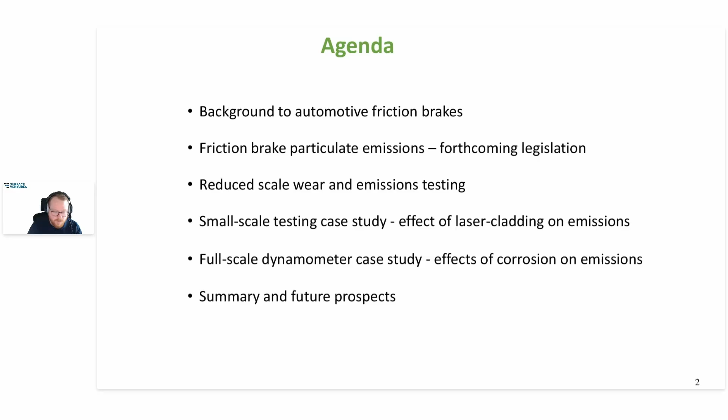In terms of the basic layout of a hydraulic disc brake, we can see on the left a section of an opposed-piston disc brake in which the action of the pistons is to push against the discs, and you can clearly see how that happens as they move towards the discs or the rotor.

We then look at the friction surface much more closely. We can see a classic three-body situation with the disc shown in blue on the right-hand side there, the pad in green, and the transfer layer formed between the two in orange. It's the tribological interaction between these three bodies that creates the frictional torque required to slow the vehicle. But as we know, friction generates wear. Wear leads to particulate emissions, which is commonly known as brake dust.

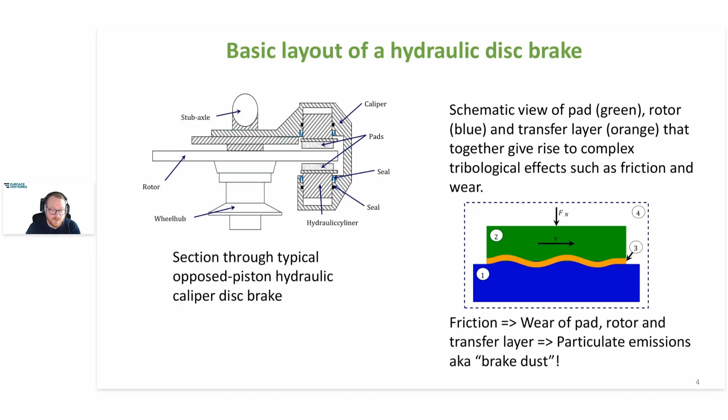And there have been increasing concerns about the effect of particulate emissions from road vehicles on human health, especially in urban areas. Particulate emissions are classified by their mean aerodynamic diameter into several different ranges. Different particle sizes, when inhaled, can penetrate into different parts of the body, with submicron particles able to cross into the bloodstream and even find their way into the brain, with those indicated such as PM1 and PM2.5. PM5 will be in airways, and then PM10 will generally be captured in the actual nose and mouth itself.

And with that penetration into the brain, there have been links found between nanoparticles in the brain and Alzheimer's disease. The second graph on the right indicates that as PM2.5 and PM10 emissions from internal combustion engines have diminished, largely due to the use of particulate traps on diesel engines, the contribution from so-called non-exhaust emissions will continue to rise and may already exceed that from exhaust emissions. And of those particulate emissions, we can see that nearly 1/3 of those is friction brakes.

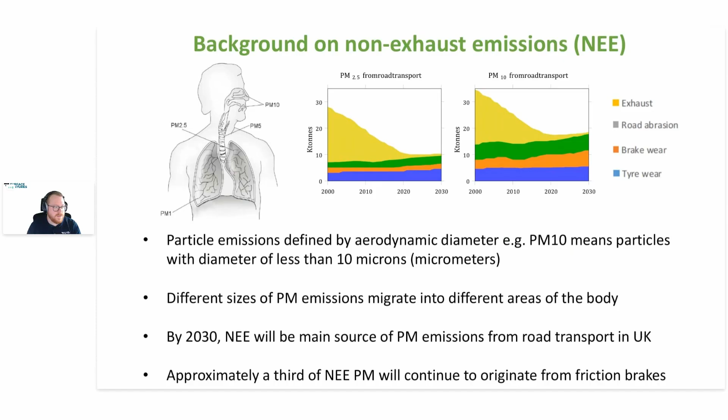So let's now take a look at friction brakes in electric vehicles. Firstly, all types of EVs are still required to carry friction brakes for situations when regenerative braking is ineffective or inadequate. One important consideration is that EVs tend to be significantly heavier than their internal engine equivalents, as shown in the right-hand figure, where we can see vast differences in weight between the different classes of vehicle. On average, PEVs are 26% heavier than their internal combustion engine counterparts. And GVWs are typically over the 2-ton mark.

Tire and road surface emissions are therefore likely to be higher for EVs, but brake emissions may also be affected with the increasing vehicle weight. The fact that friction brakes on any EV may be used less frequently due to the contribution of regenerative braking may make them more prone to corrosion and to other forms of surface damage.

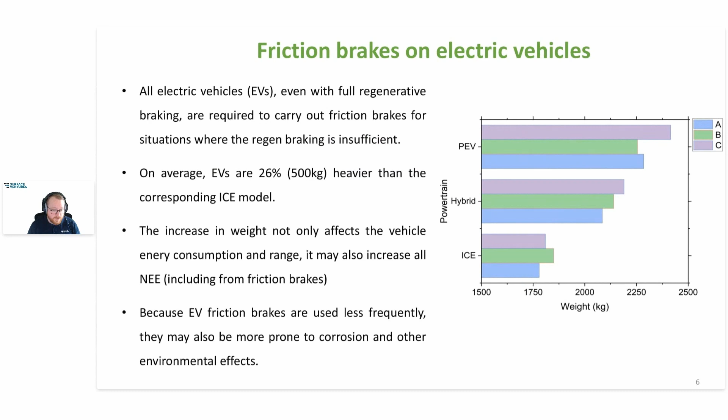Now, turning to limits on PM10 emissions under the Euro 7 legislation set to be introduced next year, different limits have been set for PEVs and all lightweight and medium-sized vehicles, as shown in this table. Limits are also due to be introduced for HGVs by 2030, but one important difference is that these are likely to be normalized with respect to vehicle weight or axle loading, whilst the light vehicle limits are independent of weight. OEMs and brake system suppliers are struggling to find ways to meet these limits, and the most likely short-term solution seems to be the use of some form of hard coating or surface treatment for the standard grey cast iron rotor.

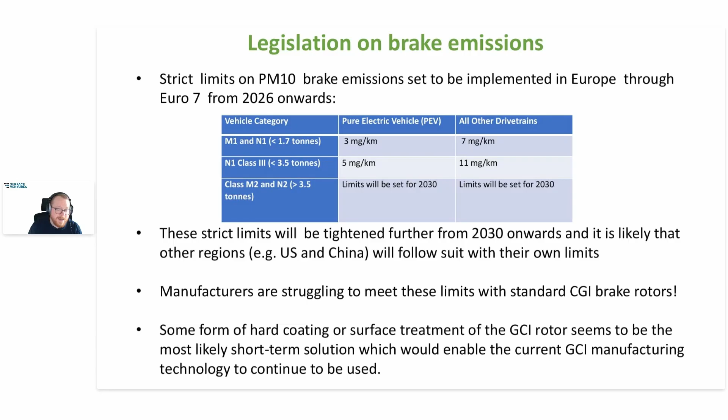The Euro 7 emissions are to be measured to the UN GTR 24 test schedule using the WLTP braking duty cycle. That is the World Light Duty Vehicle Testing Program. But this requires the use of large and expensive dynamometer test equipment, which may be beyond the reach of many brake system suppliers and manufacturers.

Reduced scale testing may be able to quickly and relatively cheaply evaluate emissions prior to full-scale dyno testing. And the University of Leeds, and David Barton specifically, has developed one such test bench around the Bruker UMT Tribolab, which we will take a look at in the next slide.

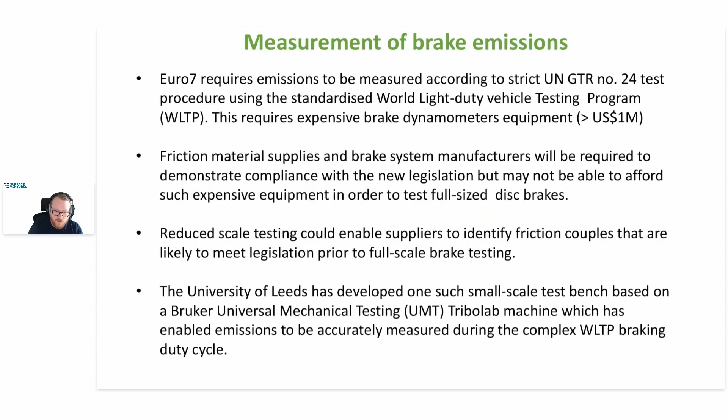So moving in this case, as you will see it from right to left, clean air is supplied via a HEPA filter that's passed through an enclosure around the small disc sample, then goes through exhaust ducting, where it's sampled through a Dekati cascade impactor. Good particle uptake and steady flow conditions are confirmed by the CFD analysis, which we have there on the right, and that has been programmed to the WLTC duty cycle, and this is in the Bruker software, and a very good correlation has been found with full-scale dyno tests when scaling effects are taken into account. The image of said scaling we can see here on the top right.

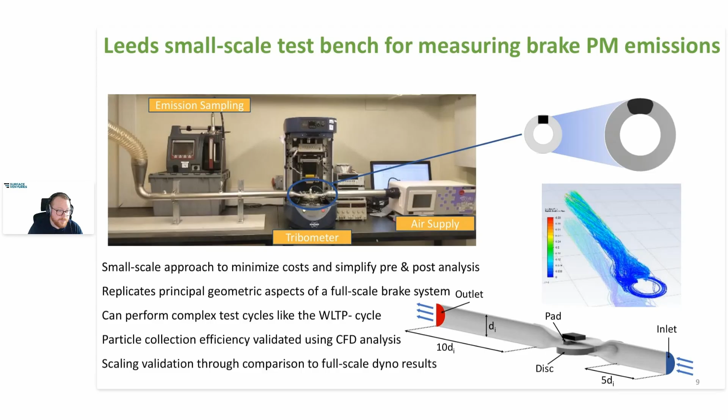Okay, the scaling approach is to replicate as much as possible the geometric and tribological contributions of a full-size disc brake. So generally, there would only be one small piece of pad material pressed into the small sample disc. The area aspect ratio, the sliding velocity ratio, and the angle subtended by the pad are all set to be in the same range as a typical passenger car brake, and the disc mass is also scaled accordingly to give the correct thermal inertia. Now we're going to move on to describe the first case study carried out using this small-scale test approach.

The starting point for this case study was a full-sized CV brake disc, which had been laser clad to give a 2-layer coating consisting of roughly 100 microns thick, pure 430L stainless steel buffer layer, and then a composite top layer of 430L plus titanium carbide particles.

The small 97 millimeter diameter samples were cut from the disc and were tested against a standard low-met friction material over 8 full WLTP cycles. Friction, wear, and emission results were compared with those for corresponding uncoated gray cast iron discs as a reference.

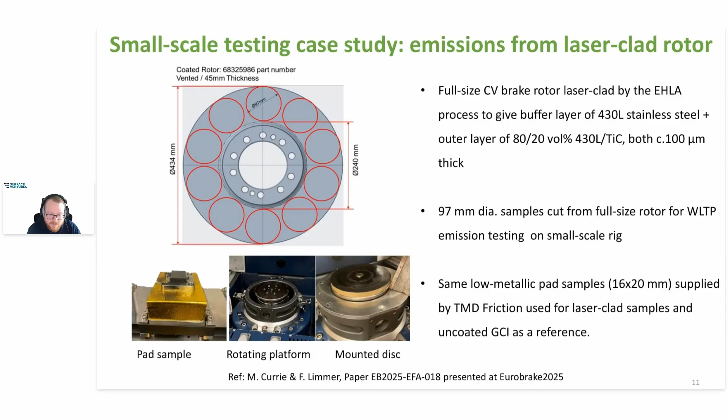Okay, now looking at the friction and wear results for the full 8 WLTP cycles conducted, we can see that the laser-clad rotor took more cycles to reach roughly the same coefficient of friction as the gray cast iron. So we can see there to WLTP cycle 5, the coefficient of friction cycles are very similar. And it may be that it takes longer for the laser-clad surface to establish a stable transfer layer, a fact that could be of concern for brake suppliers whose systems are expected to work perfectly from the first brake application.

And perhaps because of this initially low coefficient of friction, pad wear for the laser-clad sample over the full 8 cycles is reduced, as we can see for the figure on the bottom right. But more importantly, wear of the laser-clad disc is actually reduced to that is barely detectable.

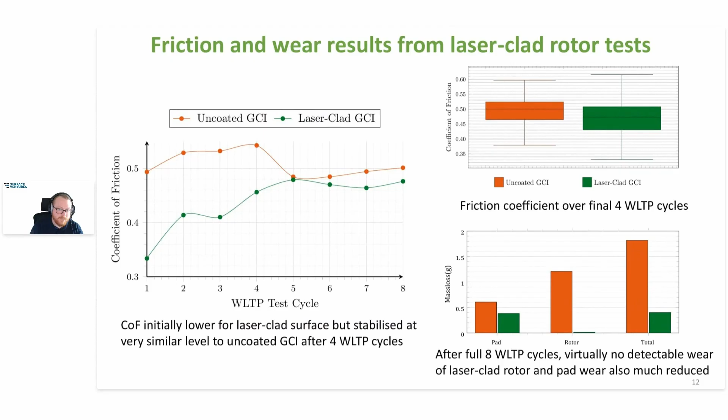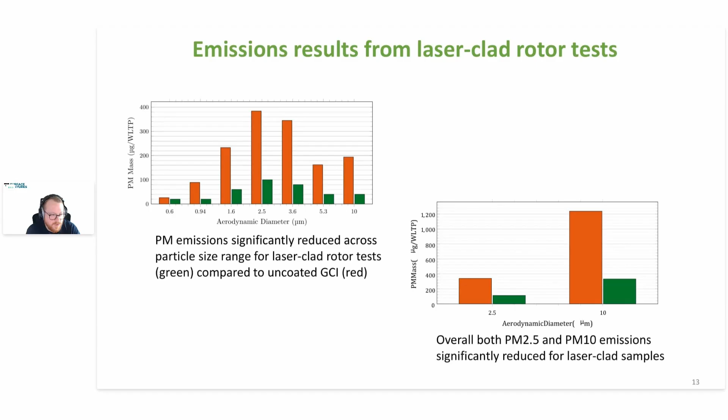Okay, now looking at emissions results as measured by the Dekati over the final 4 WLTP cycles, it can be seen that the laser-clad sample produced a lower particulate mass across the whole particle size range down to 0.6 microns. And importantly, both PM2.5 and PM10 emission masses were significantly reduced compared with the uncoated sample.

All very encouraging results. So these emission results can be extrapolated into a full-size test vehicle by applying the appropriate scaling factor and assuming that the vehicle is fitted with 4 similar disc brakes. The results of this extrapolation for both standard gray cast iron and laser-clad rotors are compared with the current Euro 7 limits in the figure on the left. As you can see, the emissions for the uncoated rotor are predicted to be 4 times more than the limit for internal combustion engine vehicles.

In contrast, the laser-clad rotor results are much closer to the limit, and we can now look further into reducing those particulate emissions with further optimization of the friction material.

Of course, the set limit for EVs is lower still, and it's worth bearing in mind that the results that were generated are for as new discs and pads without any allowance for any in-use environmental factors such as corrosion.

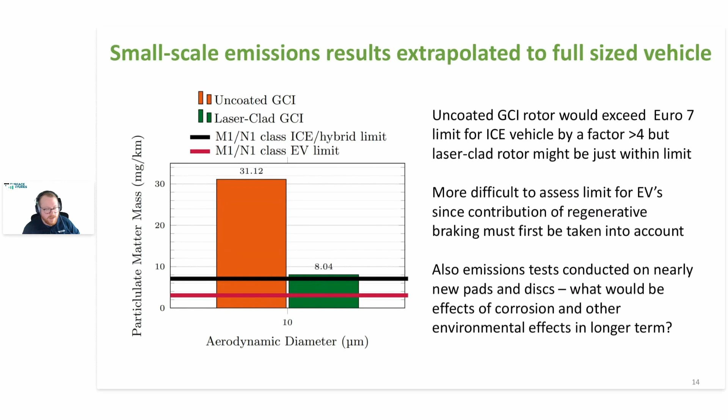Now, in order to quantify the potential effects of corrosion on emissions, but also to consider prospects for light alloy replacement of the traditional grey cast iron rotor, a further study was carried out using the full-scale dyno at the University of Leeds. Here we can see lightweight alternatives that were considered alongside the standard grey cast iron disc brake.

Firstly, a prototype aluminium metal matrix composite rotor, as previously fitted to the Lotus Elise and Chrysler Prowler. And secondly, a plain aluminium disc alloy coated with an alumina ceramic surface layer, as applied by plasma electrolytic oxidation. The two aluminium discs both used bespoke aftermarket brake pads supplied for the Lotus Elise, whereas the grey cast iron used standard low-met brake pad.

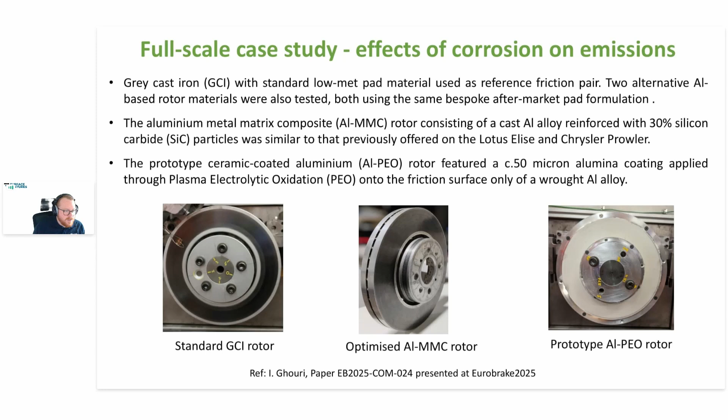The upper left photo shows the grey cast iron disc installed on the dyno, which utilizes a special squeal-reducing 4-pot caliper. The brake head is enclosed with an airtight chamber to which clean air is supplied via a HEPA filter. The air on the outlet duct is sampled at a remote location using the same Dekati impactor as for the small-scale tests. After initial drag braking tests at different pressures, corrosion for all three discs was conducted in a salt spray chamber according to ASTM B117.

And we can note there that the disc brake, or the rotor, is inclined at a small vertical angle just to allow for runoff of the salt spray itself.

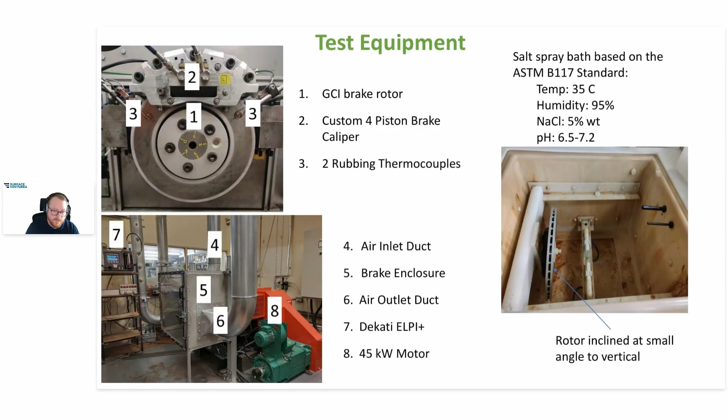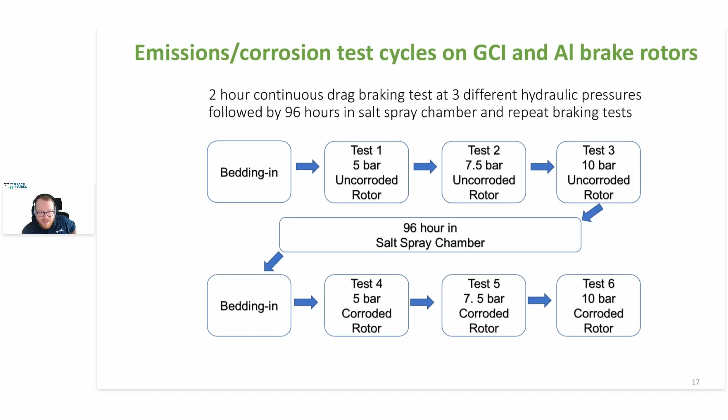Okay, so after bedding in, all three rotors were subjected to repeated drag braking testing at a speed of 150 RPM and hydraulic pressures of 5, 7.5, and 10 bar. Each test lasted for around 120 minutes and was repeated 3 times to check for consistency. Then, after 96 hours in the salt spray chamber, the whole sequence was repeated again for the, at that point, corroded rotors.

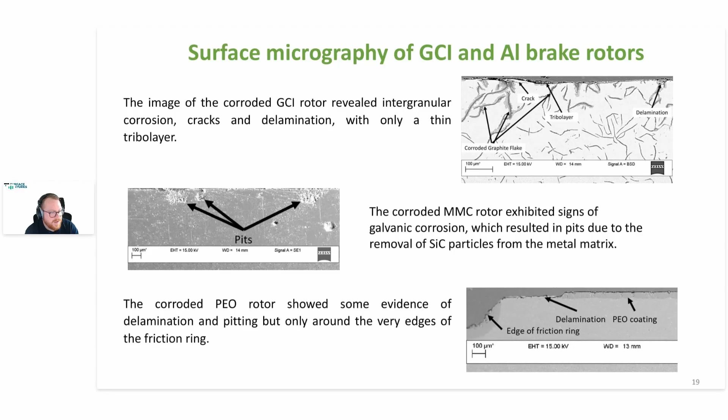Emissions from the metal matrix composite rotors also increased significantly after corrosion, especially at lower applied pressures. And in contrast, the emissions from the PEO rotor were consistently the lowest of all three rotors, and importantly, were not significantly affected by the corrosion cycle.

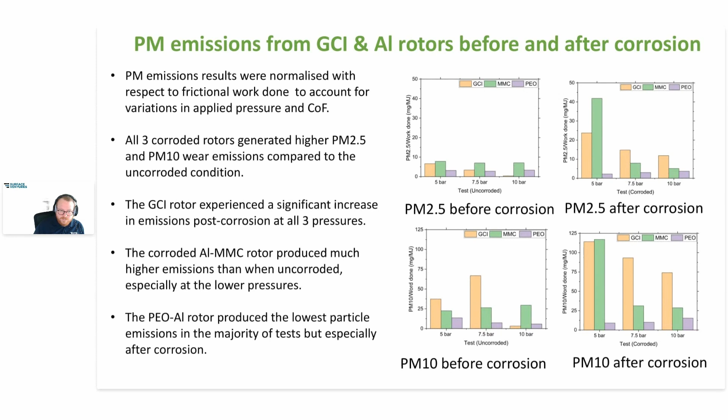And now, in summary, EVs are still going to need to carry friction brakes for the foreseeable future, and the weight of these brakes and their infrequent use are, of course, a cause for concern. Grey cast iron rotors are not only heavy, but also prone to corrosion. They're unlikely to meet such Euro 7 emissions limits without some kind of hard surface coating or treatment, such as ferritic nitrocarburizing, FNC. Aluminium rotors give significant weight saving at moderate additional cost and have been shown to give good friction and thermal stability up to moderately high surface temperatures.

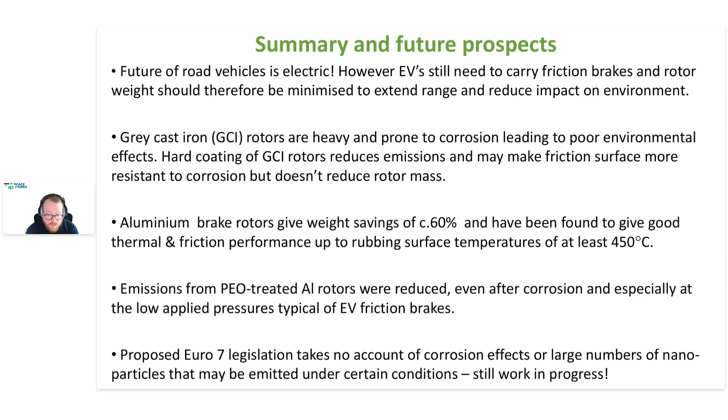Emissions from the PEO coated aluminium rotor were reduced, even allowing for the effects of corrosion. The Euro 7 legislation takes no account of the effects of corrosion or the large number of nanoparticles that can sometimes be emitted, which are the most dangerous from a health point of view. There is still much work in progress.

So thank you all very much for sitting through my best attempt at Professor Barton's talk. As you can see there, his email is on screen. This talk will also be present in the recording. So should you have any further questions, you can email him there. Just also like to, on his behalf, acknowledge the Leeds PhD students that took part in this work, as well as the industrial companies Cummins Meritor, Curtiss-Wright Keronite, TMD Friction, Bruker, and TWI UK. Thank you all very much for listening. As I said, we will not be taking any questions; if you want to ask questions, please email David.

But now we will be moving over to Alaitz and Iñigo's talk. So I will invite both of them on stage. Shall we start? Please do, sorry. Yes, please go ahead and show your slides. Okay, so I'm going to share the screen then. Okay, there we go. Please let me know if you can see it. Please proceed. Okay, thank you very much.

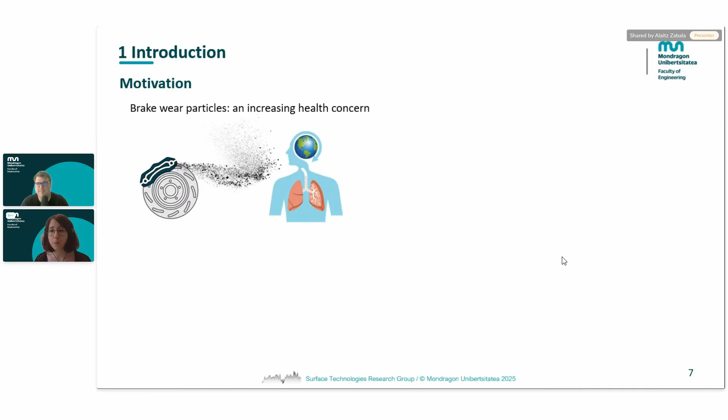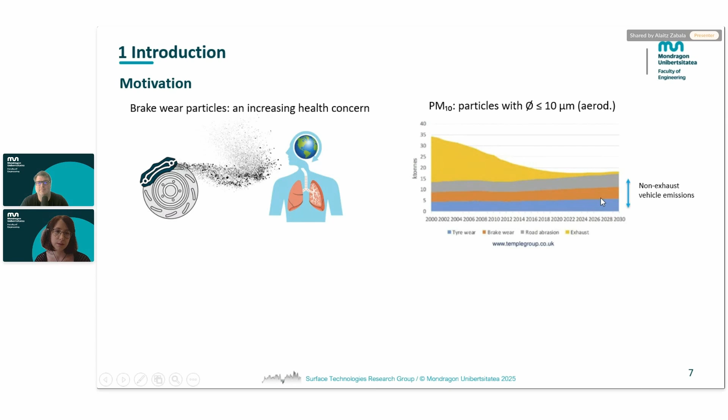The motivation of the work starts with the increasing health concern related to the brake wear particle emissions to the atmosphere. The following graph shows the PM10 particle emissions of a vehicle along time. As we can see, in the last couple of decades, the amount of exhaust emissions has decreased considerably, and nowadays, the brake wear particles represent a significant amount of the total non-exhaust vehicle emissions.

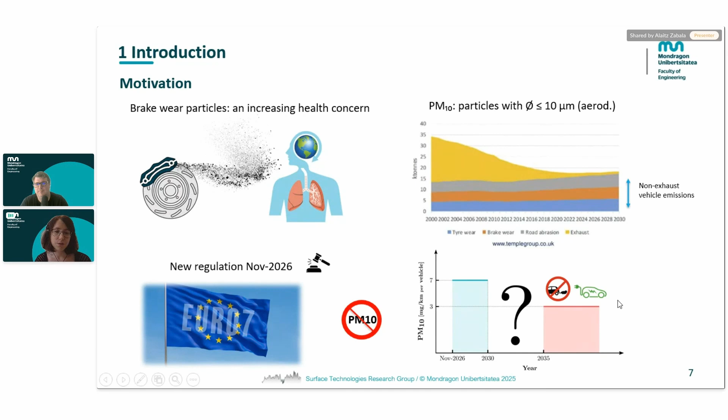In this context, for the very first time, the European Commission will launch a new regulation, the Euro 7, at which the amount of PM10 particles that could be emitted from the braking systems will be limited. It will set an initial limit of 7 milligrams per kilometer at first, and later on, this value will be decreased due to the arrival of electrical vehicles. The standard that has been adopted for the regulation for the brake emission measurement is the GTR number 24, which is based on the WLTP cycle.

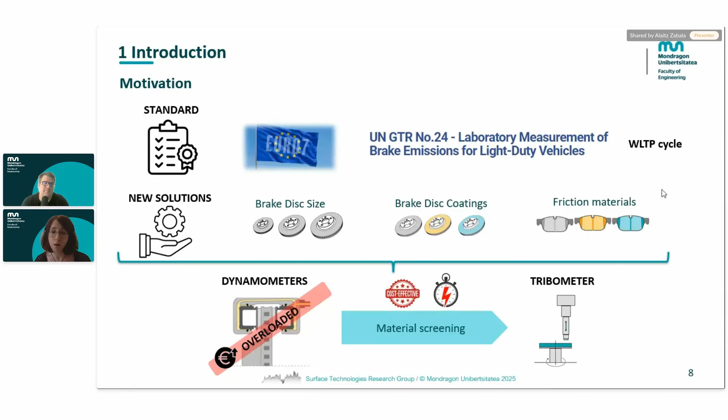Considering the amount of new solutions that are being developed in order to mitigate this brake wear emission, nowadays the dynamometers are saturated, and moreover, they represent a high cost in the pre-validation stage. Accordingly, alternative tools in order to have cost-efficient and rapid material screenings are of high interest, such as tribometers.

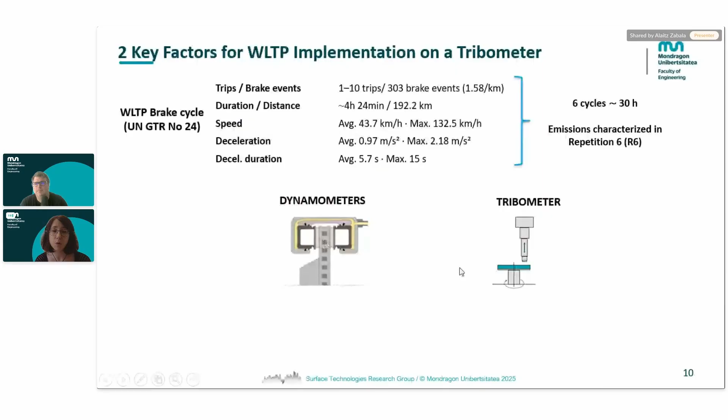In order to have a proper implementation, the very first step is to have a good understanding of the functional differences between the dynamometers and tribometers. The first one is related to the inertia. While the dynamometers do have a flywheel to simulate real inertia, the tribometers don't have any inertial mass. That's why in the tribometers, we impose the motion. So the system is not really braking. We are simulating the deceleration. While in the dynamometers, we do have a real braking, dissipating the kinetic energy.

From the point of view of the control, dynamometers do have a closed loop at which the pressure is actively controlled depending on the coefficient of friction of the tribo system under test. On the other hand, in general, tribometers work under open loop conditions at which we need to fix the input variables before the braking events, and they are set constant during the testing.

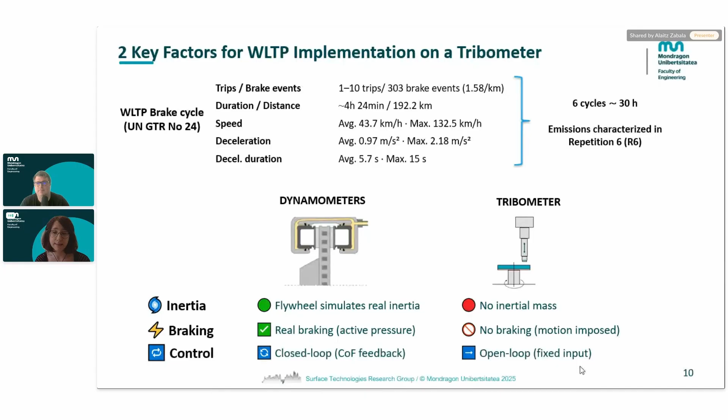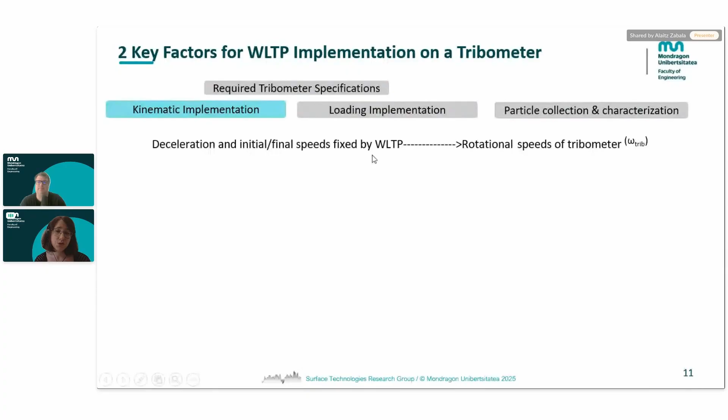Now we're going to go through all of the different aspects that should be considered for a proper implementation, starting from the kinematic implementation. I would say that this is the easy part. The WLTP fixes both the deceleration and the speeds. Basically, we just need to translate this information into the rotational speeds of a tribometer. In order to do so, the variables involved are, on the one hand, related to the vehicle under study, more specifically to the vehicle wheel characteristics. And on the other hand, they are related to the tribo system configuration, more specifically to the effective radius of the tribological test that we are going to perform.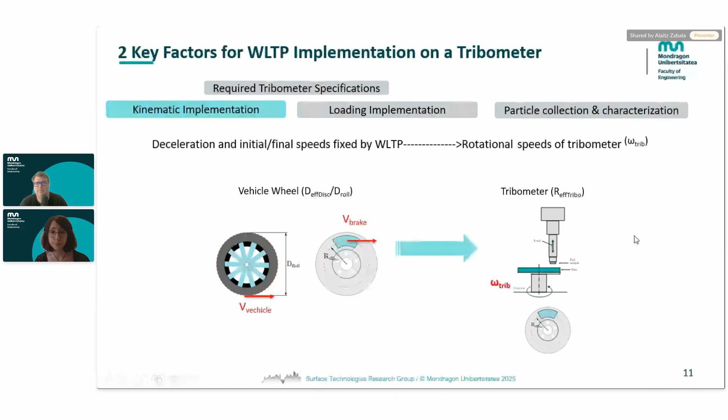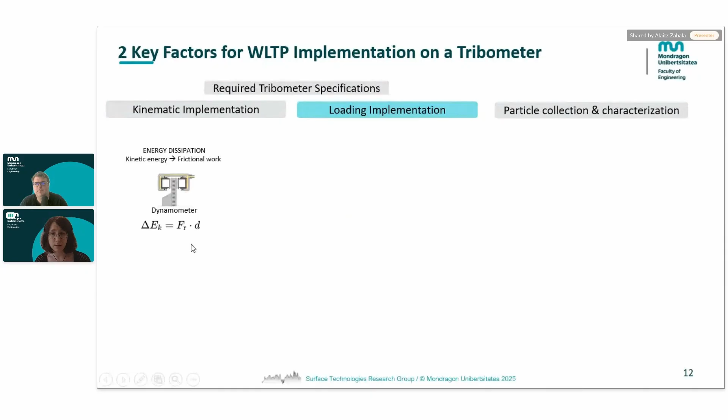Regarding the loading implementation, we know that in the dynamometer, all of the kinetic energy is dissipated by means of the frictional work. So based on that, our miniaturization is based on a functional area scaling at which we need to fulfill two equivalence criteria. On the one hand, both systems should present equal energy dissipation per unit area. Considering that the braking distance is fixed, both systems should also have the same specific friction force.

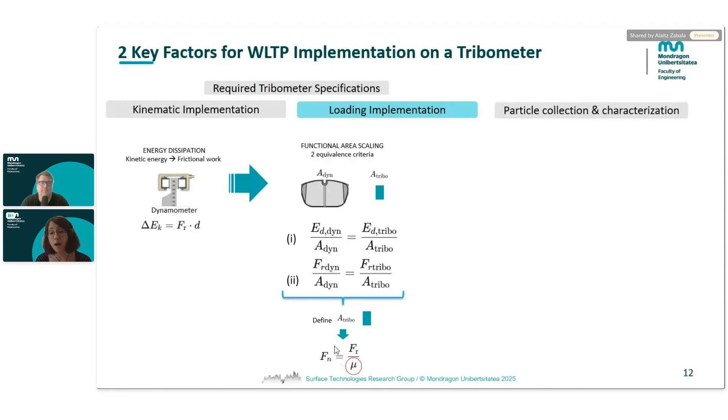So once we apply those two criteria, if we define the area of the pad that we are going to use in the tribo system, we can directly compute the normal force. However, this normal force will depend on the coefficient of friction, which is an output of the system, and it's an unknown variable at the beginning of the test.

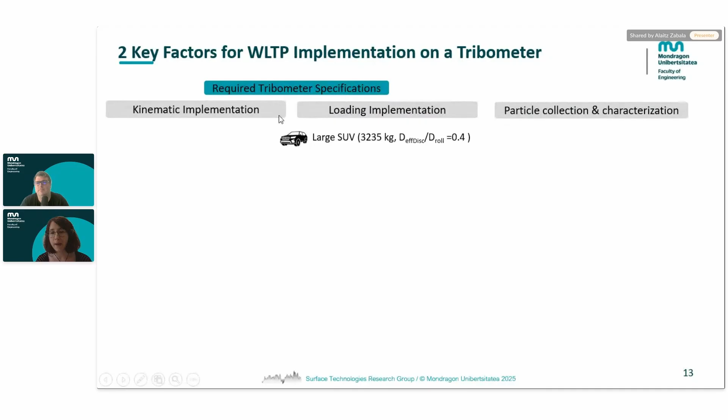Once that we had a look about the key factors of the kinematic and loading implementation, I would like to provide an overview about which are the required tribometer specifications if we would like to reproduce the WLTP. In order to do so, we selected a large SUV vehicle as a heavy vehicle. Here we do have the rotational maximum speed required in the tribometer, depending on the effective radius selected. As we can see, if we select a small radius, as the radius is decreasing, the maximum RPMs are increasing in a non-linear way. It should be considered that many times the miniaturized samples should be extracted directly from the real disk, which means that the usable radiuses could be small, so that the maximum RPMs required could reach up to 8,000.

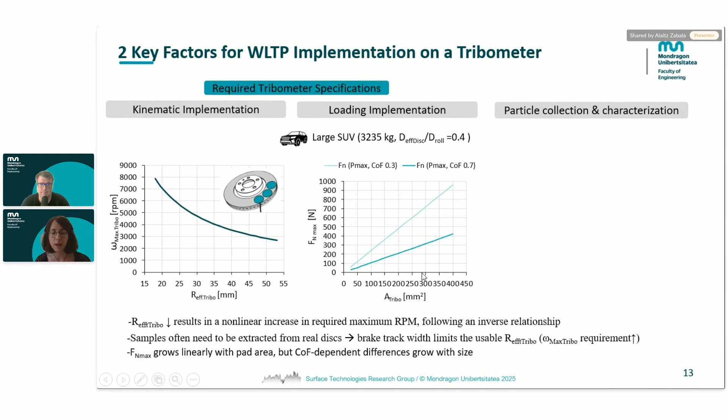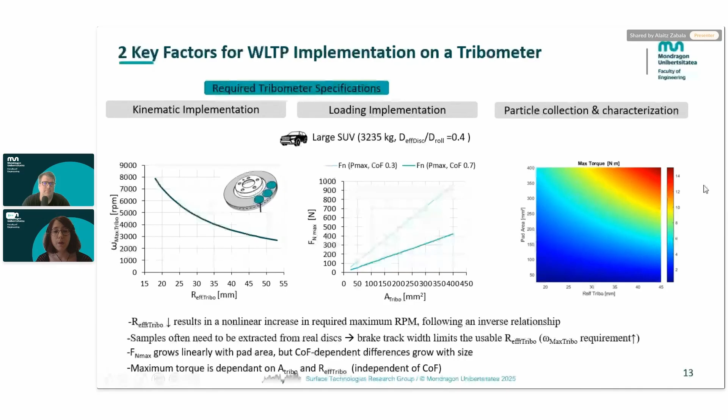Regarding the maximum normal force required, this will depend on the coefficient of friction of the tribo system under test. As we can see, there is a linear increase depending on the area. The differences between both coefficient of frictions tends to get bigger for bigger areas. However, considering both cases, the maximum normal force lies below 1 kilonewton. Finally, we do have the maximum torque required in the tribometer, which is independent on the coefficient of friction since it depends on the friction force. And we can see the maximum values are below 15 newton meters.

Finally, we do have the requirement for the particle collection and characterization. And here we can see the scheme of the setup that we developed in the Bruker UMT Tribolab following the GTR 24 specifications. First of all, we do have the airflow and the air conditioning. Afterwards, we do have an anemometer in order to measure the speed of the air and to adjust it so that we can ensure isokinetic conditions. And finally, we do have 2 sensors for the emission characterization. On the one hand, we do have an optical sensor for in vivo monitoring of the emission. And on the other hand, we do have an impactor to physically collect all of the particles so that we can measure the weight later on.

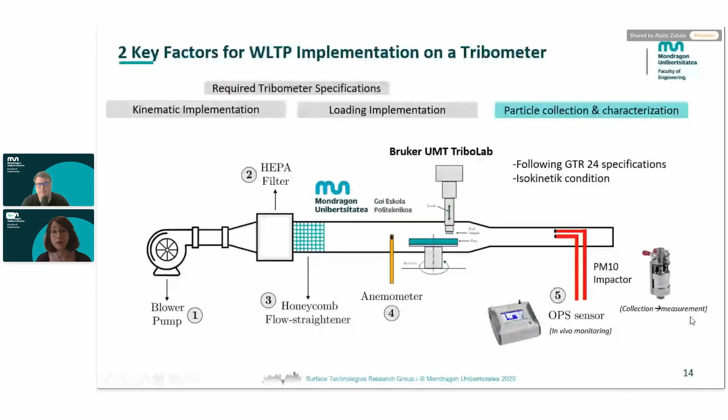So now I'm going to give the floor to Iñigo so that he can continue with the presentation. So thank you very much, Alaitz. And now we will continue with the results and the correlation analysis. Next, please.

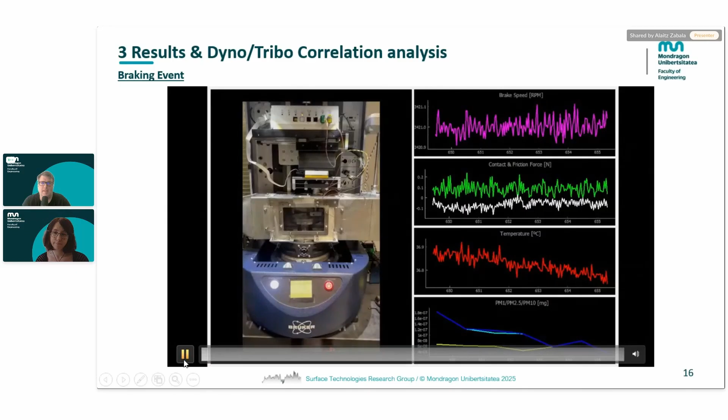So here you can see a simulation of the braking event, and I want to focus on the actuator or the tribolab. There you can see that we applied a normal force, and then we can monitor the brake speed, the decrease of the brake speed, the evolution of the contact force and the friction force, the evolution of the temperature, the rise of the temperature due to the energy that we introduce to the system. And finally, also we can see the particle emission that happens during the braking. Okay, this is only for one braking. And then we can analyze the braking metrics that we have in the next slide.

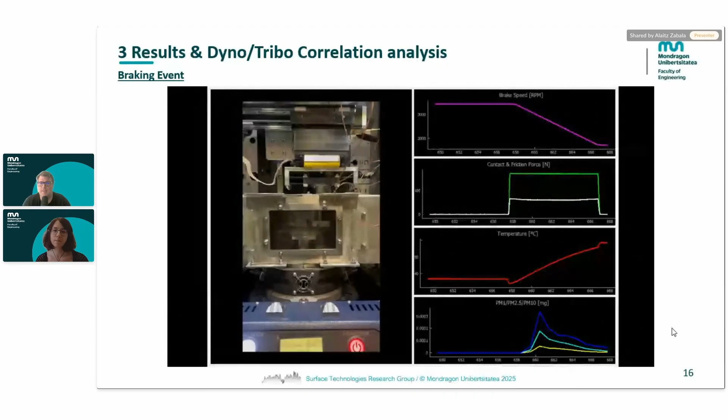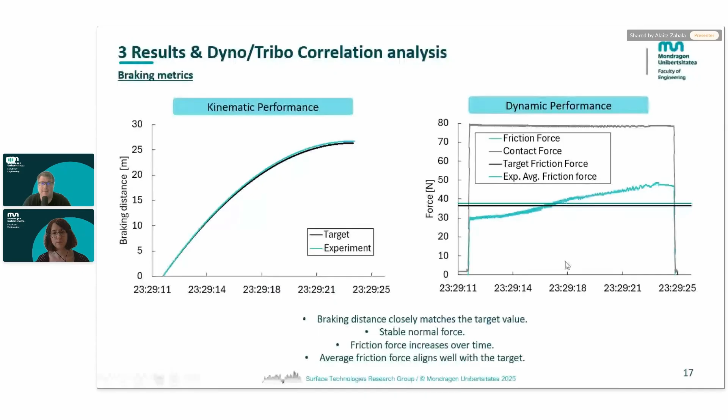Regarding the dynamic performance in the right-hand side, again, in the x-axis we have the time, and in the y-axis we have the force. Checking the contact force, we can see in the gray, we have quite stable normal force. And contrary with the friction force, we can see that we have an increase over time. And this is because we have fixed the normal force, and the friction force is the evolution of what happens during the braking. So again, we can compute the average friction force, and we can see that the obtained average friction force is quite close to the target that we have. So once we have defined these values, then in the next slide, we can compute the dissipated energy, and we can see the results.

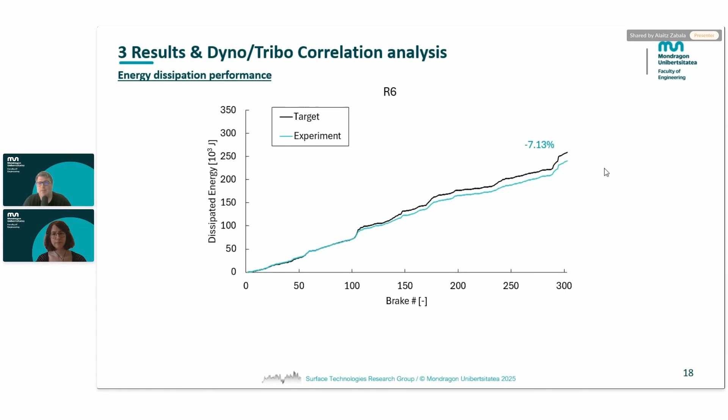This is quite high, but once the algorithm that corrects the friction coefficient kicks in, we can compare the performance on the last repetition, and the result that we obtain is quite good, around 7% difference. Usually in tribological tests, differences around 10% are quite normal, so this lies within that value. We can say that we have a really good correlation between the tribometer performance and the dynamometer performance in terms of accurately reproducing the kinematic, dynamic, and tribological behavior.

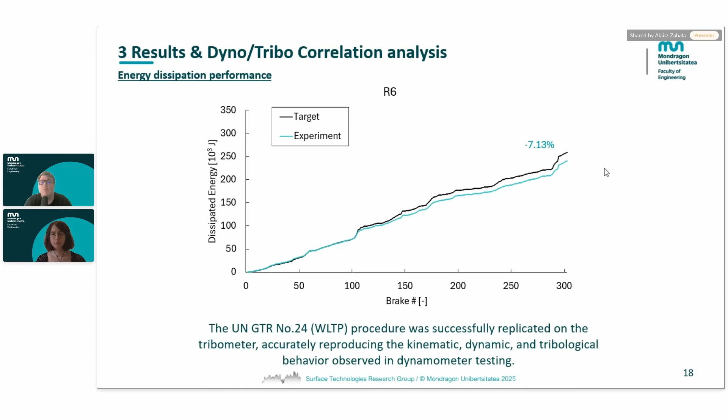So now the question is how the particle emissions measured in the tribometer compare with the dyno. So we have here in the next slide, this correlation for the GCI and low metallic case, the current solutions that are in the market. In the x-axis, we have the different repetitions of the WLTP cycle. And the y-axis, we have the PM10 and PM2.5 values that we obtain. In the first repetition, as I said before, we introduced to the system more dissipated energy, so we obtain more particle emission.

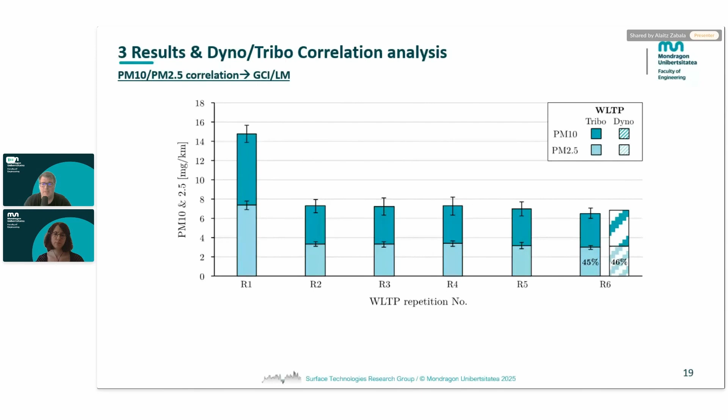Again, we also have to consider that there is a bedding process here. So essentially, in the first repetition, we have quite a large amount of particle emission. However, in the consequent repetitions, we have really stable values, and in the sixth repetition, where the measurement is performed officially in the GTR, we obtain quite similar results, less than 8% difference between the tribometer and dynamometer. If we go to the literature, we can see the interlaboratory round-robin reports that say that a difference of 20% between laboratories that comply with the GTR is quite normal. And because we obtain less than 8%, we can say that for this tribometer, we obtain a really robust comparison.

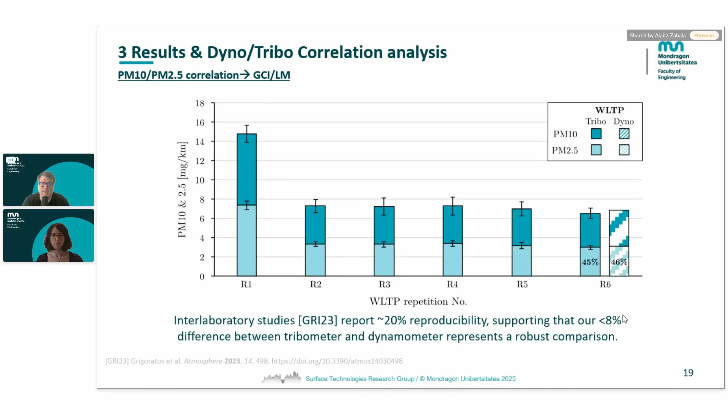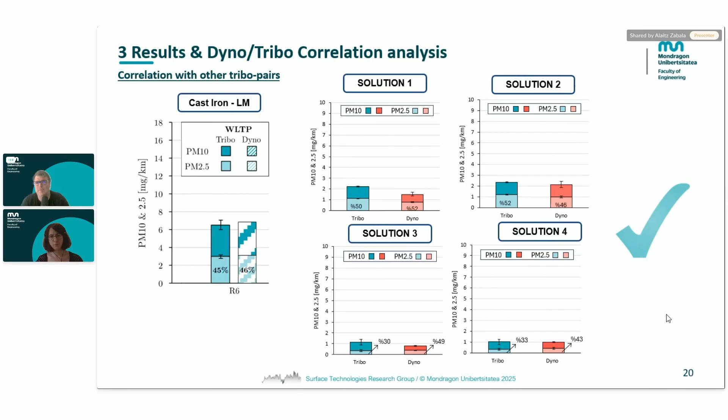But what happens with other materials also? We can see in the next slide. Again, this is the cast iron that we compare, and then we can see different solutions. Those different solutions have different particle emissions, and we can see that in all cases, the correlation is quite good. The worst that we have is around 20%, which is within the typical difference that we can see in the literature. So we can say that we obtain a really good correlation in the tribometer compared to the dynamometer with different solutions.

So now, just to finish my talk, we can draw some conclusions. We saw an overview of the challenges of the implementation of the WLTP standard. The dissipation energy that we introduce is quite important. So we developed the complete WLTP cycle in the tribometers in terms of the dynamic, kinematic, and dissipated energy, and we obtained really good results. We can say that the PM10 emission has been successfully replicated in the tribometer compared to the dynamometer results. And therefore, we can say that when key physical parameters align, the tribometer should reliably replicate the dynamometer conditions for PM10 emission, at least for the WLTP standard.

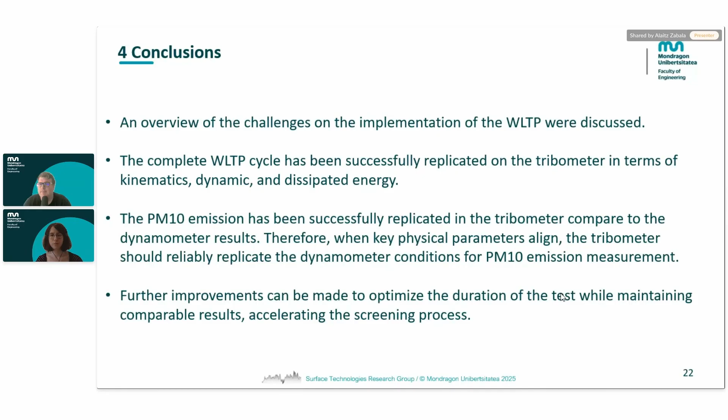Obviously, because we are talking about tribometers, further improvements can be made to optimize the duration of the test, because as Alaitz said, the complete WLTP test is 30 hours. So that's too much. And in terms of looking for a screening process and a screening tool, we are developing an optimized version of this to have a quite fast comparison. So that's all for our part.

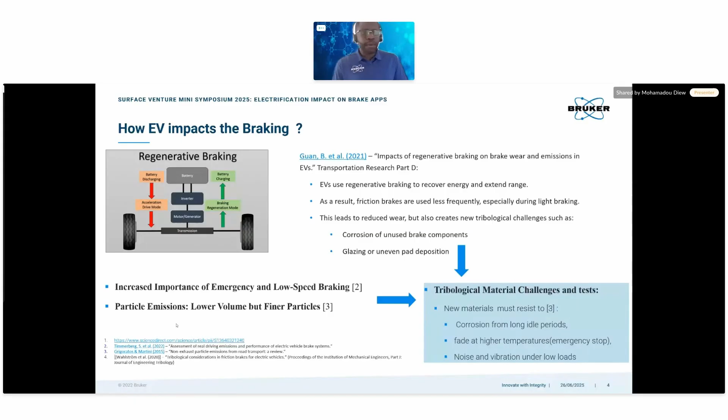And the other thing is more for cities. As you know, the electrical vehicle is quiet, with really less noise, and braking will be one area where we will continue to generate noise, and this will probably be a thing that more and more industries, and even customers, will look at.

How to find the right braking? We see that many parameters have an effect on the brake material that we need to choose. You have the braking performance with friction, wear, and particle emissions. You have fading resistance at high temperature, low noise, low vibrations, good wear resistance, and good heat dissipation, because mainly when you brake, you will generate heat. With regeneration in e-vehicles, probably one part of this is recovered, but not all. We will continue to generate this heat, and there are all the environmental considerations.

But at the end, we will need something that stops the car. It means we will have friction that could be around 0.4 to 0.6, depending on the type of material that we are thinking of. But this work I leave to the brake part manufacturers to develop the right tool for this.

Currently, to characterize the right braking, as you already saw in the presentations of Agusti, Iñigo and Alaitz, they showed that the best testing for all of us will be the real vehicle. This test is in realistic conditions, in terms of road, environment, and everything that can be completely different from the standard. But this type of test is expensive, complex, and at the end really time consuming, and we need to collect a huge amount of information and find the right way to explain it. It will be a little bit complicated.

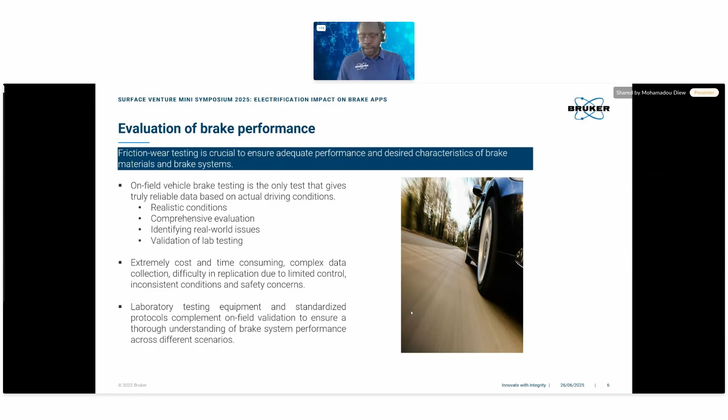That's why more industries moved to laboratory testing with a standardized protocol like the AK Master and others. This kind of testing will help to define and do the screening of materials. But when you take a full dyno, you need a full rotor, a full brake disc with a caliper, with all the other things. As Agusti said, the caliper will have an effect.

The grease that you use on the backside of the caliper will also have an effect. The roughness of the surface, we already talked about it, will probably have an effect. And you also have two materials, one being the composite materials from the pad materials, which can sometimes be electrically insulated and can create some electric charge in the contact due to this braking event or friction events. And this can start some micro pitting or others on a material. All of these are many parameters that can affect the contact at the same time.

At the end, you have a complex testing where you will put a lot of money. It will take a long time to run, and at the end you really do not know what the impact of each factor on your system is, or you need to put a huge amount of money. In between, you have scale dynos, the way you can have small bench tests where you can also put a complete rotor on some piece of that.

And another possibility is using a model tester. It is moving toward something more at an industrial level or academic level, with a simple pin on disk testing or 3 pin on disk testing, where you have the possibility to control all the parameters and know exactly the pressure that you apply, the speed that you apply, the temperature, the environment, and characterize well the impact of each of these parameters on the system.

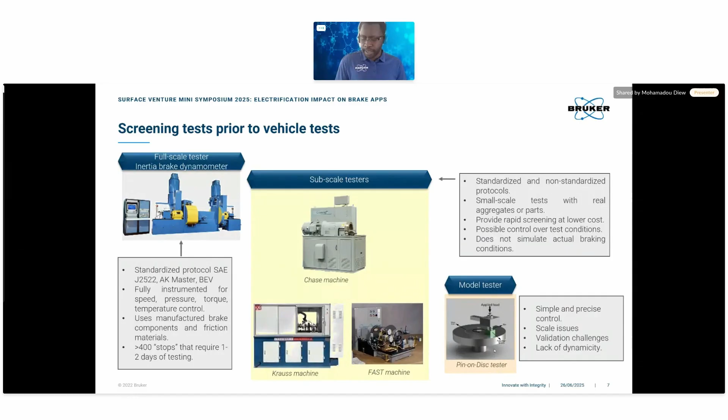But if you want to use this model tester to describe something, we need to start with a tribological system. What is a tribological system? It can be defined with six elements: the contact geometry, the type of motion, the operating conditions, load, speed, frequency, duration, and others, the material properties and chemistry, the surface topography, which can be important in some cases, and the environment. And when we define this tribological system, we can also define which type of equipment and surface analysis we need to study this type of system and get the outputs that we are expecting. But keep in mind that tribology is a multi-scale and multidisciplinary science.

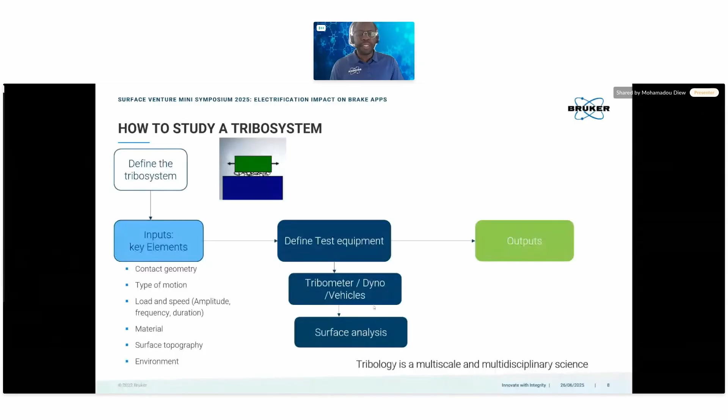We need to take into account different things that sometimes will not be so trivial. The tribological approach that I present here takes, for example, the brake conditions with well-known SI parameters, vehicle parameters, weight, inertia, rotor diameter, tire diameter, to get SI parameters that we can convert to tribological system parameters, to our tribometer parameters. At the end, you will have the braking conditions. Is it something that looks more like the AK Master, where we are driving a high-speed car, or something that will be more city application? For this, we can use the guidelines designed by the standards.

Friction materials are really important, because they are the part that we will need to use to characterize the friction. Design will have an impact. Here, for example, we see a plain disc rotor without any holes, but if we have holes, potentially these holes can also generate wear mechanisms on the system itself. The environment: do we have humidity that can create corrosion or others? And this can also have an effect on the friction behavior and particle emissions.

If we convert these vehicle parameters to tribological system parameters that can be used to define a testing, we can use a flat on disk. It can be 1 pin on disk or 3 pin on disk. Both solutions can work. Motion can be rotation like the rotor disk. Two components of materials using the pad and the rotor disk. As Agusti said, you can take one rotor and pick several disks on it to run the same testing. Define the operating conditions through following standards or homemade protocols to only characterize different materials that we can link to the performance of our material on a dyno or other type of system testing.

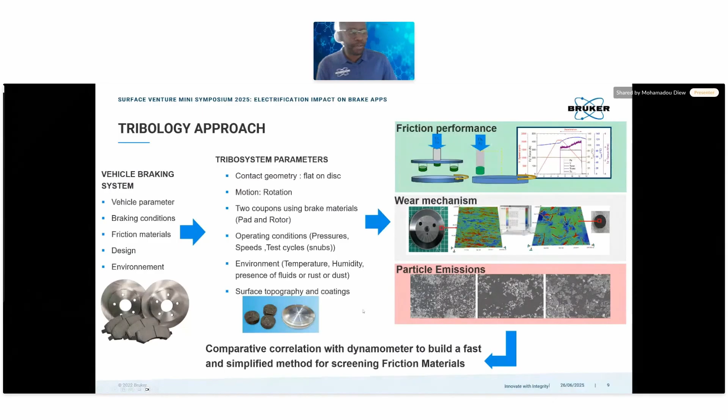We also add on our system some particle emission with a filter using a Dekati impactor, and this one will allow us to collect particles at different sizes from PM10 to PM1. Using this value, we can have a comparative correlation, as we already saw previously, with a dyno, to build a fast and simplified method for screening friction materials at the end.

But before this, you have optical profilometers to characterize the roughness of surfaces before and after the testing, to be sure of what really happens and how we can describe the wear mechanisms that happen in this configuration of testing that we run. You can also go to a lower level, for example AFM, if you see on the secondary plateau some generation of powders, to characterize these powders and know better what is really happening, what their structure is, and if they can help to build a phenomenon of what is really happening in the contact and generates these particles.

Or you have the tribo indenters that allow us to also characterize the primary or secondary plateau, to get the mechanical properties and see what is the effect of these properties, at the end, on the overall performance of the braking system.

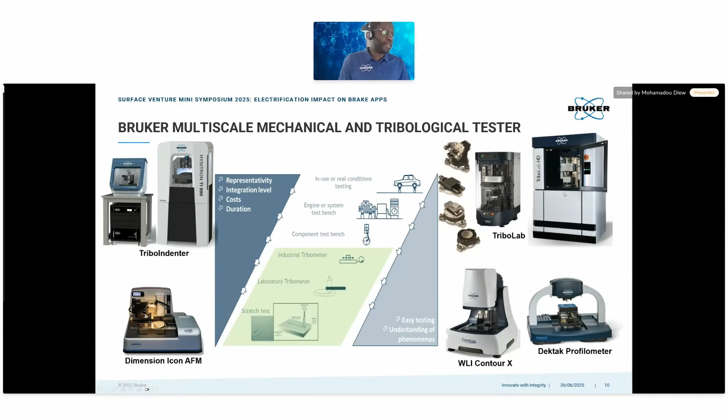Let's focus now on tribology applications with the TriboLab series. In the TriboLab series, we have 3 different types of TriboLab systems. The UMT is the most versatile one and allows running different types of testing on tribology, even mechanical testing. And the TriboLab HD is more dedicated to friction materials, where you have the possibility to rotate up to 3000 RPM with a torque that can be 50 or 55 Newton meter, even at 3000 RPM. It means high torque, and you can have high power on the system. The last one is not really focused on brake applications, but more on semiconductor, for polishing wafers.

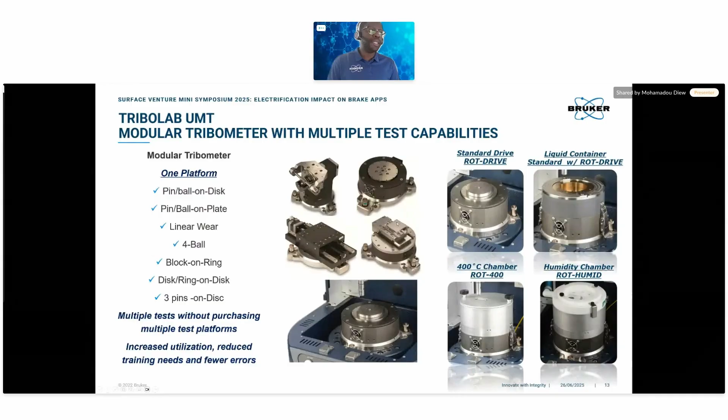If I focus a little bit on the TriboLab UMT, the most versatile one, it's a system that allows different types of motion with 4 different types of drive: a rotary drive, a block and ring that also has a rotation, and 2 linear movements, a reciprocating one and a linear one for characterizing coatings. For example, the linear drive can be used to perform scratch testing. And all of these drives can be added on the UMT TriboLab platform. Within a minute, we can add environmental chambers, even controlling humidity, heating, or a liquid container, or even work without any environmental control.

This work is done in collaboration with Oerlikon Metco, where we take a TriboLab and add a sliding thermocouple on the side of the 1-pin configuration, and underneath we have a cast iron disc. We run several tests, as I showed previously: green mu, burnish, first characteristic, and speed pressure. It means from 10 to 80 bars.

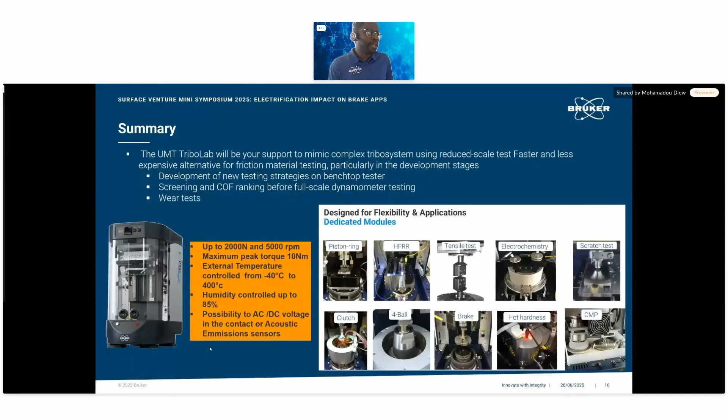Using this system, you have the possibility to screen different types of material, get the tribological performance and surface topographic evolutions, and start building wear mechanisms that allow us to better understand how brake materials behave in certain conditions using simplified testing.

We have the bigger one, the TriboLab HD. The only thing you need to keep in mind is that the TriboLab HD has five times the torque: instead of 10 maximum, it can go up to 50 Newton meter at 3000 RPM. You can use bigger samples, which means you will generate more heat in the contact. This system also has an embedded heater in the rotor disc, so you can heat underneath the disc and get faster to 550. It allows you to compensate if you did not reach the right temperature by friction alone, and to increase the temperature a little to get to the fading mode, where the temperature can be higher.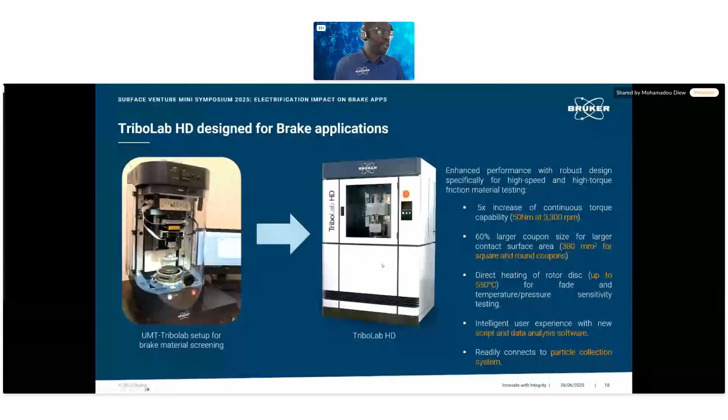On this, you can add the particle collection system with an impactor and a pump that allows you to collect particles and analyze them post-mortem after the test, to get the size and distribution, and, with chemical analysis, information on the particle structure and chemistry. I already went over it.

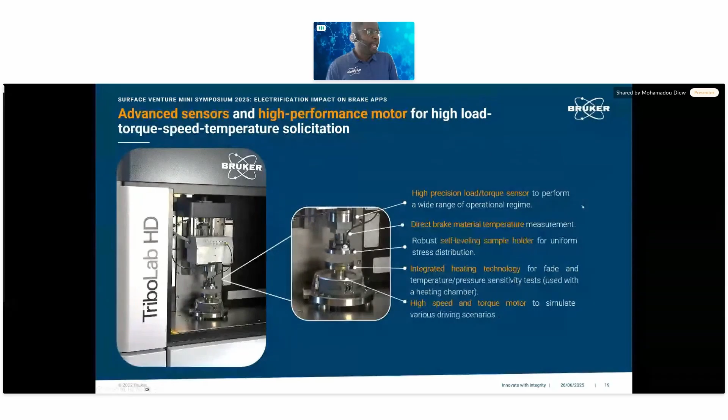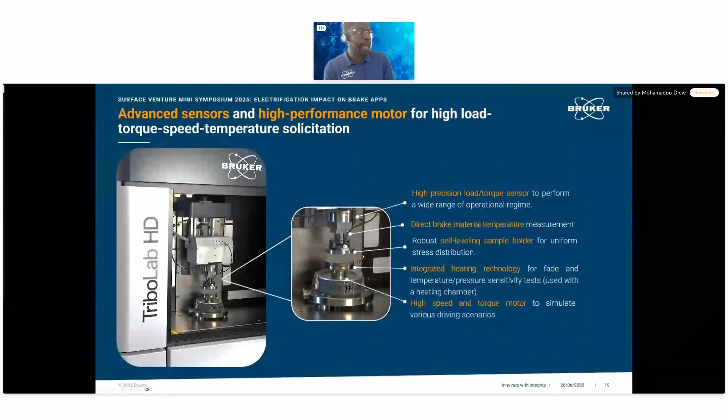You have different points: high speed, high torque, integrated heating on the rotor disc, and a self-leveling holder. It will be the same even on the TriboLab UMT. This makes sure that if you have two flat surfaces, they are in perfectly conformable contact. It is sometimes better to have this self-leveling to compensate for the tilt that can happen, because no surface is perfect. You can easily characterize your system with small samples. Here you can go up to 100 millimeter in rotor disc size, and 3 coupons up to 380 square millimeter.

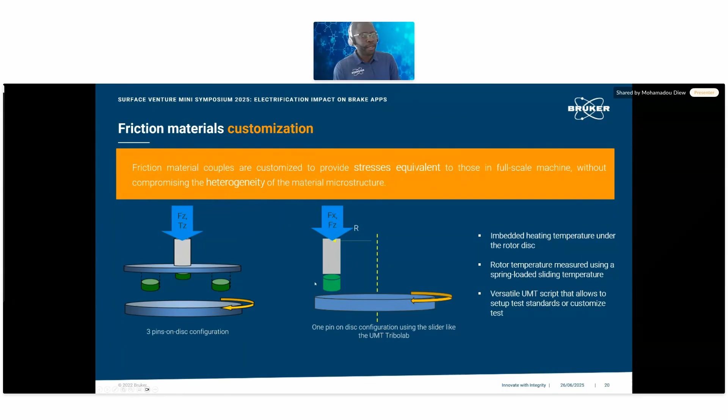Two configurations are possible: 3 pins on disk or 1 pin on disk, depending on what you're expecting to run. 3 pins is more stable, 1 pin is also something simple for testing, but both can be run. The only influence that we see currently is that when you run 3 pins, you will get heating of the system due to the increased surface, and you will get 3 times the load that you get here. And when you only run 1 pin, the temperature will be really lower.

Yes, this thing already. And after the test, you will get on one plot all the parameters that you can control on the system. It means the speed, the load that you apply. You can also measure the temperature of the pad, on the backside of the pad, even when the pad can sometimes be an insulating material because it's a composite. The rotor disc has a sliding thermocouple, and you can also measure the torque that you get at the system. It means during the braking event, you can get all of this information.

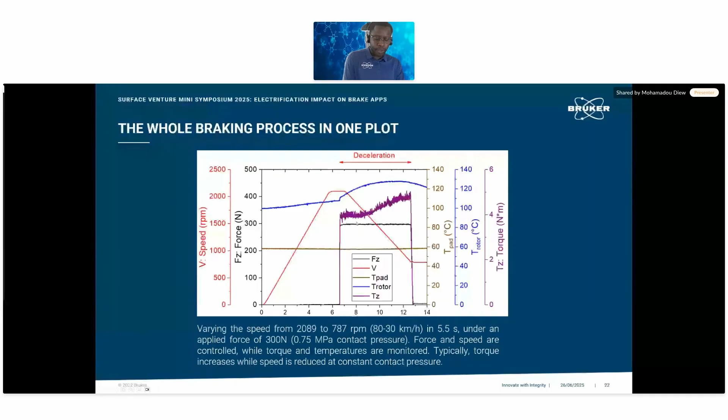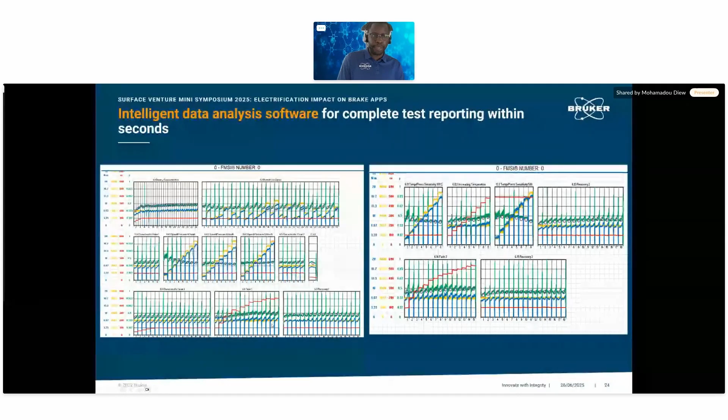And using this information, we can build, for example, a complete AK Master plot, where you can have all the different steps, even with the fading or the recovery. You can also run all of this testing with temperature purposes.

Again, our tool, these tribometers, is not replacing a dyno. It's only here to help for screening a huge number of materials and innovate faster before going to spend a lot of time and money on a dyno.

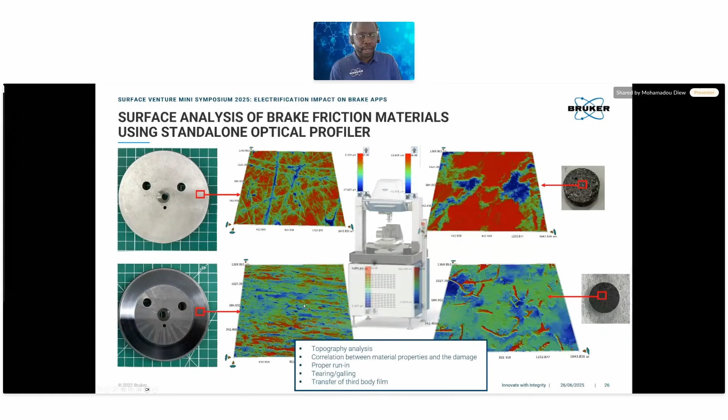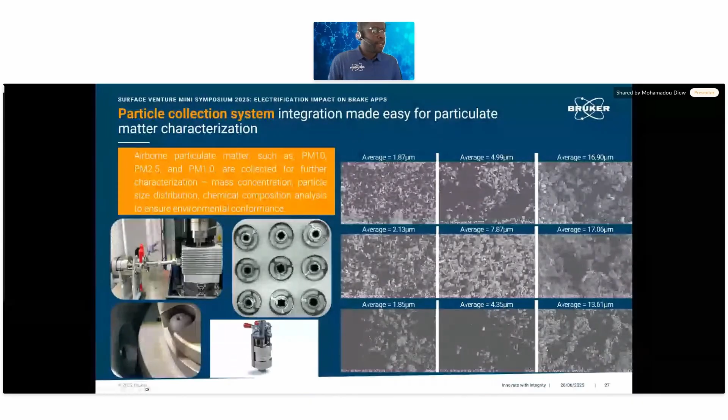As I proposed, this is more to say how we can use tribology to build a multi-scale approach. I think that even for something that will be well known for all types of tribology projects or studies, for braking more and more we need to go this way, building a kind of approach where we take into account the chemistry at the early stage, the surface topography, and testing using simple test methods. It can be a kind of reciprocal approach, where we look at the surface after the test and probably improve it before going to run another test, before moving on to expensive and complex testing on the dyno or the engine itself.

And this is one type of approach, as already shown by Agusti in his presentation. You can also try this type of approach. That means that these tribometers and all the other well-known tribological techniques can also be used for brake applications, to screen different materials and get access to the performance of these brake systems.

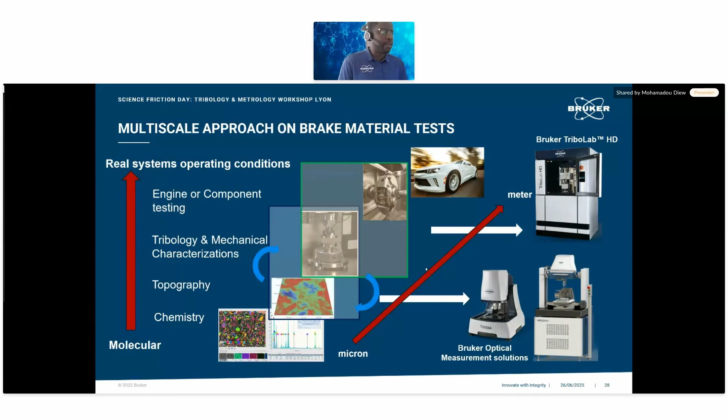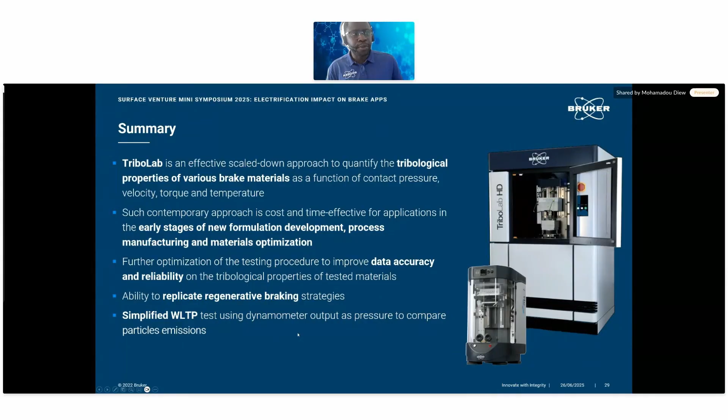In conclusion, we can say that the Tribolab is an effective scale-down approach to quantify tribological properties of various brake materials, using parameters that we can control, even the pressure, the velocity, the torque, and other systems. And this system is cost and time effective, because compared to the dyno, and you remember in David's presentation, a good dyno for WLTP will cost something like $1 million. And here we have something that will probably be cheaper than this.

And it allows you to run several tests within a week that you cannot really do on a dyno. You can only have one or two runs. As Agusti said, you can have more than seven runs in a week using only this Tribolab. You have the possibility to improve your system, your material, and adjust the process, because the scripting is quite open and allows you to build even customized scripts to get access to this information and to build something more robust and confident with what you are looking for.

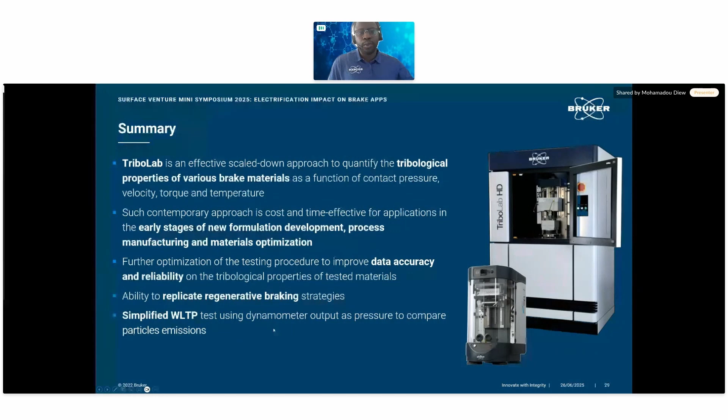You can also replicate some regenerative braking strategy depending on what you really want to run. And simplified WLTP testing run on the dyno can be done, as I also ran on it with the particle emission collections. Thanks again. I only wanted to show different tools with different sizes of load and length scale. And I only tell you: keep having fun and be crazy. Stay innovative. Thank you.

Thank you very much, Mo. That's a great summary of Bruker's application options and all the possibilities that you can do with your equipment.